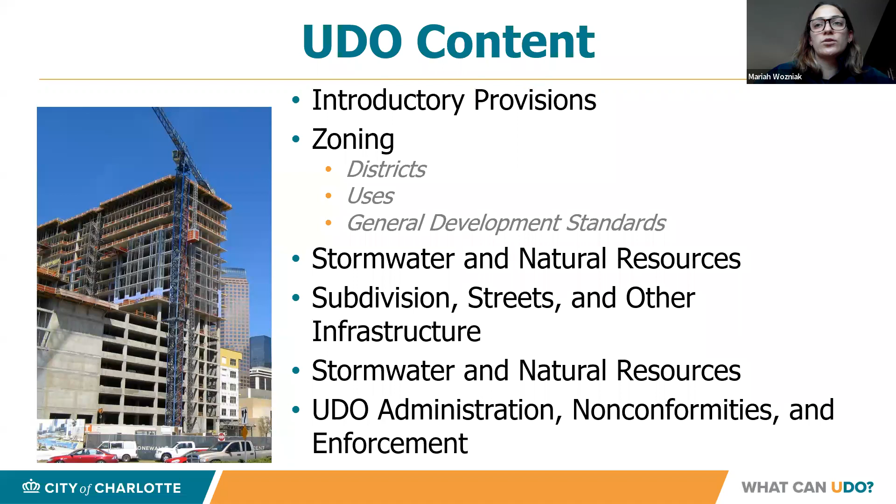Beyond those 5 broad sections, the UDO is organized into 13 parts. Each part is comprised of 1 or more of the UDO's 40 articles. So what you see on the slide is the more formal organization of the UDO, and it can show you exactly where you might find specific standards or regulations that you're looking for. So for example, general development zoning standards is part 8 of the ordinance and include articles 16 through 22.

Is Laura back with us? I'm here. Thank you. Okay, awesome. Yeah, somehow I got booted briefly. Great. Okay.

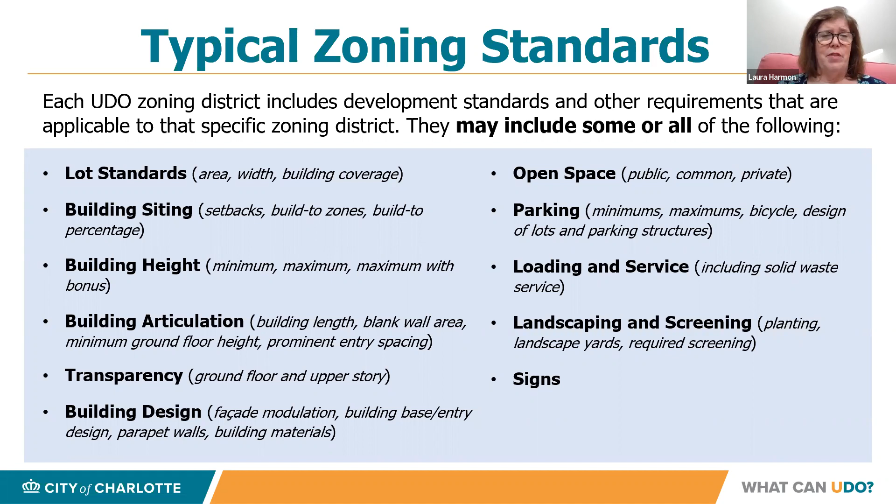A few things to know about the way the draft UDO is proposed to work, which is a little different from our current regs: many of our zoning standards are controlled by the frontage of a property. So if you're on a side of a building along a certain frontage, you'll go to the standard for that frontage type. Setbacks are an example — your building setback will depend on your frontage, typically a street frontage, though not always. It may also be an open space frontage or transit station frontage, but setbacks are controlled by the type of frontage in almost all of the districts.

There are 9 frontage types as the ordinance is currently drafted. Main Street and 4-to-5 Lane Avenue Boulevard are two examples of frontage types. For more information on frontages, you can go to pages 3-4 through 3-6.

Another thing to know is that our setbacks are measured, in all districts except the Neighborhood 1 districts, from the future back of curb. That's what we do with our current urban districts, but it's different from what we do now for a lot of the other districts. So be aware of that when looking at setbacks — it may look like that setback is really large compared to our current setback. That's because setbacks in a lot of districts now are measured from the right-of-way line, but in the future they'll be measured from back of curb. So the setback number gets larger because you're including your planting area and sidewalk in that setback dimension.

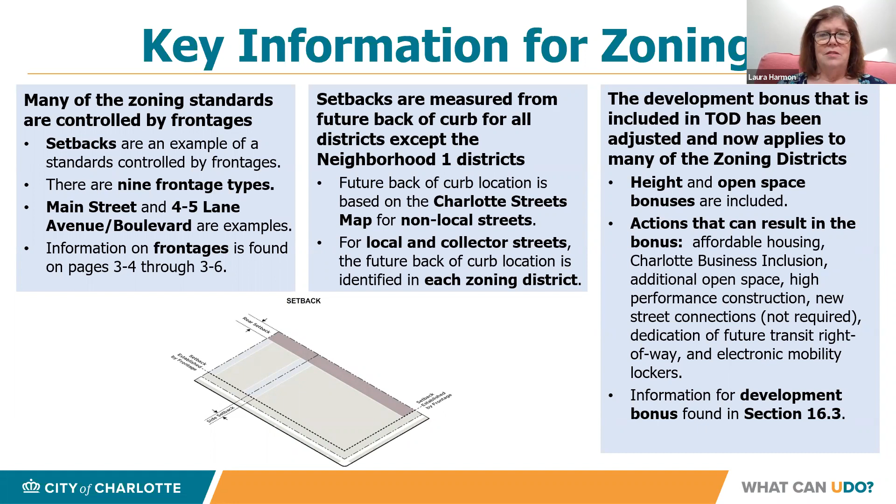Quickly moving through our neighborhood 1 districts, particularly neighborhood 1, A through E. Important to know, single family, duplex, and triplex dwellings are allowed on all lots, with quadruplex dwellings allowed on arterials with an affordable housing unit.

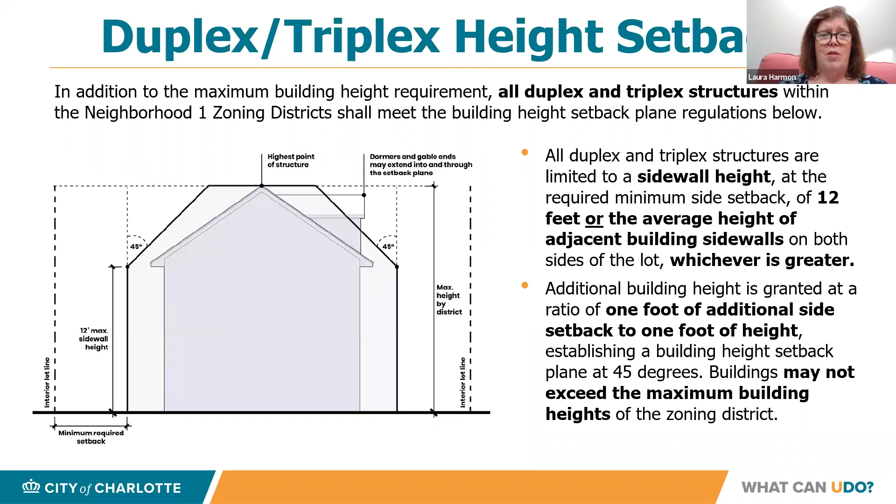You can also go higher as you move away from the edge of a property. It's a bit technical, so if you dig into this in the ordinance and have comments, we'd love to hear those.

Also be aware of a couple of development options. We have a conservation residential development that can be used with our N1 districts, which replaces the cluster provisions in our current ordinance—a different approach, but same intent.

We also have an updated version of our voluntary mixed income bonus provisions. I mentioned these earlier, so I won't go over them again, but we do have 3 overlay districts that relate specifically to most of our N1 districts.

Parking. So today is a lot of things. Going through parking, we have a new 3-tiered approach that we're proposing, and depending on your zoning district, you fit into one of these 3 tiers.

For tier 1, which are probably our more auto-oriented districts, there is a minimum off-street parking requirement and no maximum. If you move into tier 2, there's both a minimum and a maximum parking standard.

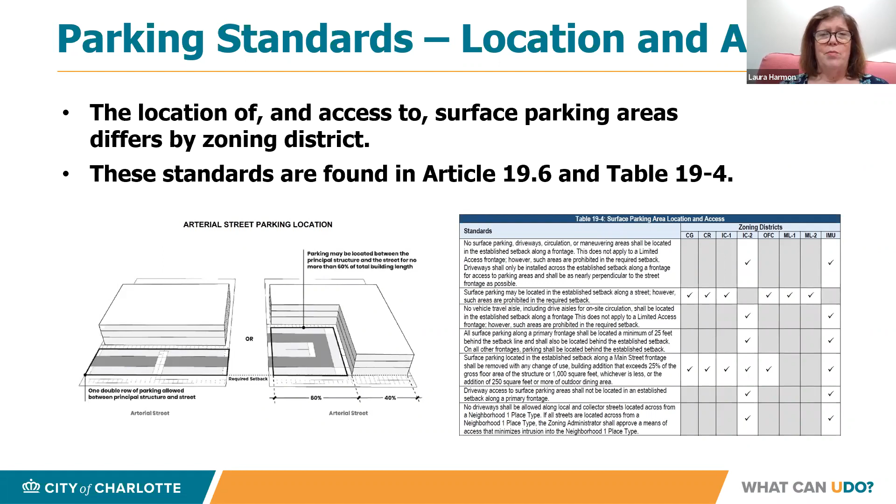And again, this is based largely on what has been done in the TOD districts.

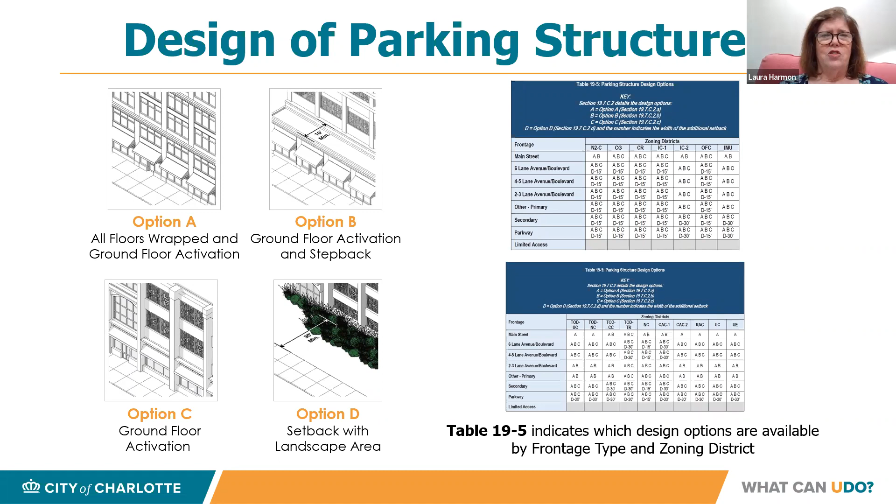Onto landscaping and screening. We have these different types of landscaping and screening. Nomenclature-wise, the biggest thing to understand is that what was formerly called a buffer is now a landscape yard.

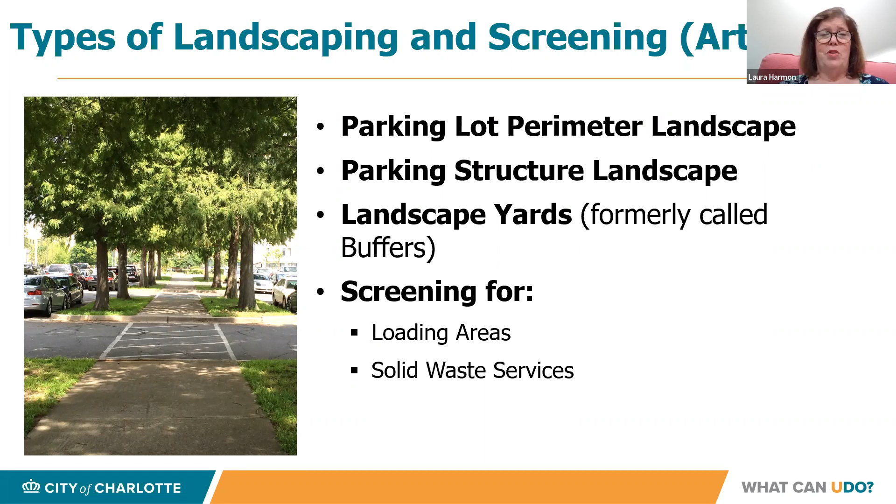Similar to buffers, we're doing these to deal with adverse impacts when you have one use that may be very intense or have impacts adjacent to a less intense use—really to provide a transition between those uses.

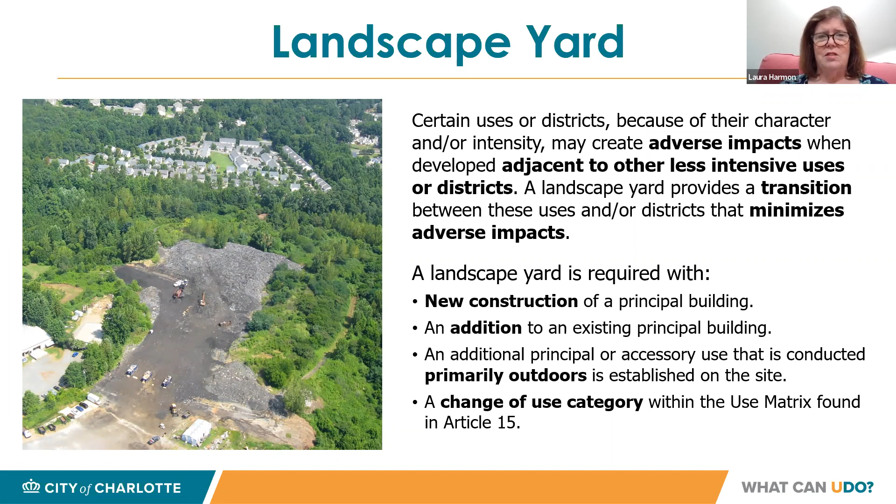Again, you'll find that we have a lot of charts in the UDO, hopefully easier to find things than reading through a lot of words.

But for the landscape yards, again formerly called buffers, you go and look for your zoning district, then look at what is your developing use and what is the use that you will be next to. That will determine what landscape yard standard you have to meet. We have 3 types of landscape yards, A, B, and C. Some similarity to what is in our current zoning regs, but also updated as far as the standards.

So take a look at those. We're really trying to make sure that we include these when we need to, protecting those uses, particularly residential, that probably require the greatest amount of protection, and letting go sometimes of those landscape yards when we don't need the transition that may be in our current ordinance. We also have some conditions, some uses that may have prescribed conditions that also require a landscape yard in addition to or different from what is in the charts.

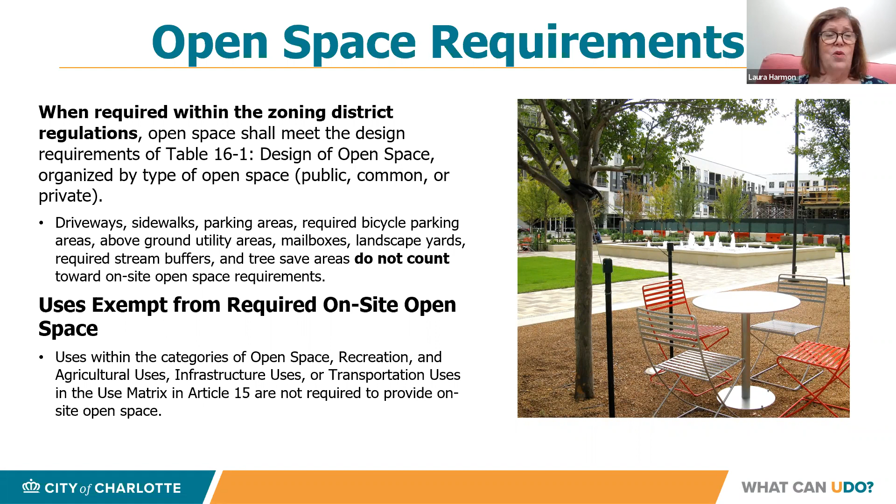So a little bit more on open spaces. As an example, you'll find a chart of what is required for, say, employment and centers zoning. You can go and find your zoning district, find the percentage of the site that is required for open space. And probably a lot of you are looking at this and going, wow, 10%.

That's 10% if it's on the ground. Yeah, it may be in some cases kind of high, but again, you have a lot of options on where that goes. So take a look at that in conjunction with the percentage requirement.

And then in a lot of cases, 50% of that open space for a lot of types of development has to be public, accessible to the public. We are going back and tweaking some of this and are hearing feedback on this, is when is it really feasible to have open space available to the public. But when you see that number, it's not 50% of your site, it's 50% of your required open space, or 25% of your required open space for mixed use development.

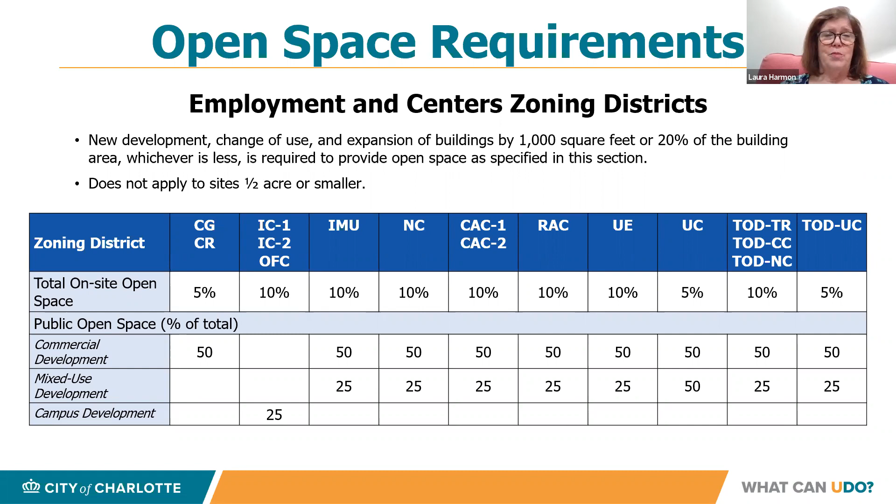And I mentioned flexibility. Again, this is something you can go back into the ordinance and look at the allowances, but we do have options for open space to be on decks, galleries, porches, terraces, patios, rooftops, balconies, in a lot of cases. So we're trying to provide flexibility to have a lot of options for where open space can go.

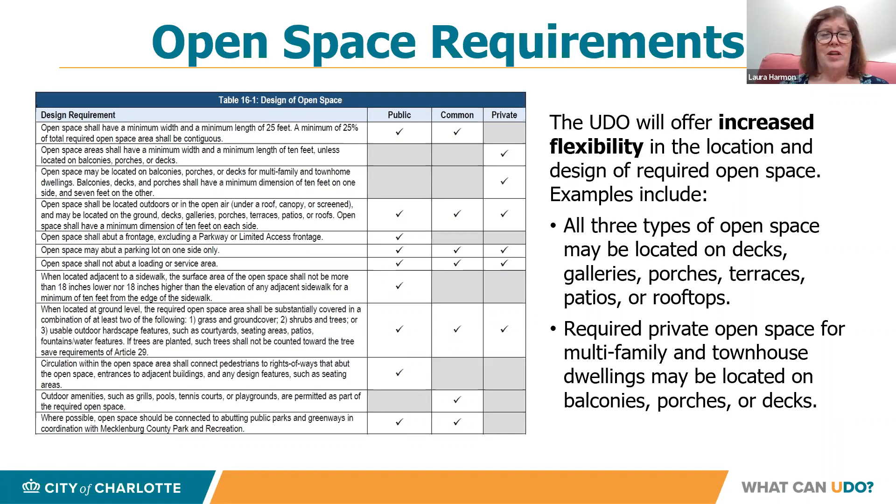So I'll say this before I get too far into my slides. Everything today is going to hit on some very key changes. We already did a virtual conversation on stormwater standards that had a lot of the intent and purpose for what we're doing. This presentation will be primarily about some very key changes and maybe how we're going to approach some of the things that we discussed in that prior meeting.

So with that being said, the first component that we wanted to present today was a discussion on Article 24, which is a new chapter on drainage standards. So subdivisions and commercial projects will continue with the current process.

So those of you that are familiar with stormwater reviews and permits, the standards are going to continue to apply, and the review process is going to stay pretty similar.

The only difference is that smaller projects are now going to be subject to some more drainage reviews, and we've gotten some questions about what that means. We want to stress that the drainage plan is going to go through a 3-tiered approach. So if you have minimal or no impact to existing drainage, you're proposing an addition to a house or some sort of yard project that could have impacts.

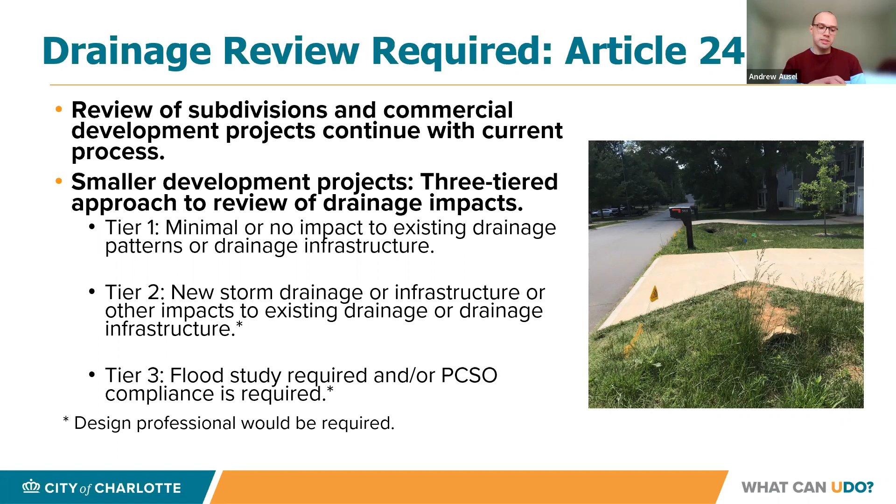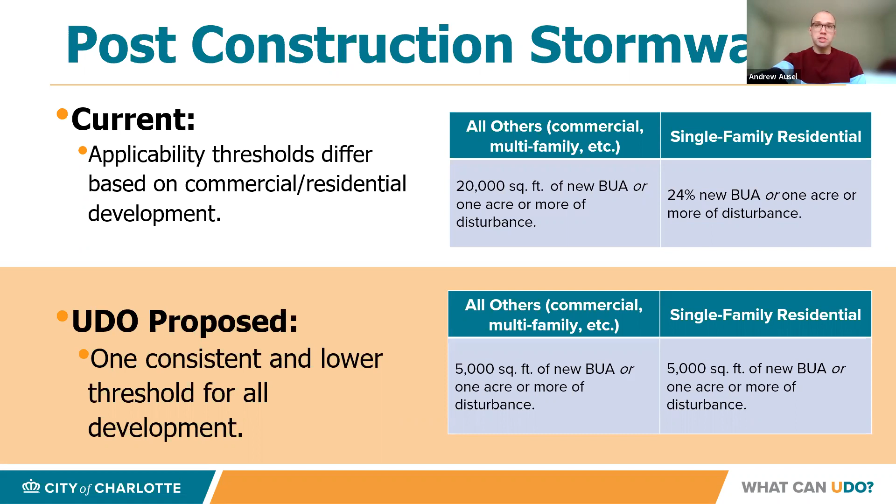This may result in us seeing more projects, but in general, I think there are a lot of benefits to this approach, and we want to get community feedback on this pretty significant change to our stormwater regulations.

The last two that we want to highlight, or I guess 3, are related to mitigation, natural area, and buffers, water quality buffers. First, on-site compliance for all sites is going to be required.

We're removing a lot of the mitigation options that are currently in the post-construction ordinance. Natural area is a requirement that is currently in our ordinance, but that is going away. We're translating that into the tree article, which does a lot of the things that we really want this area to do.

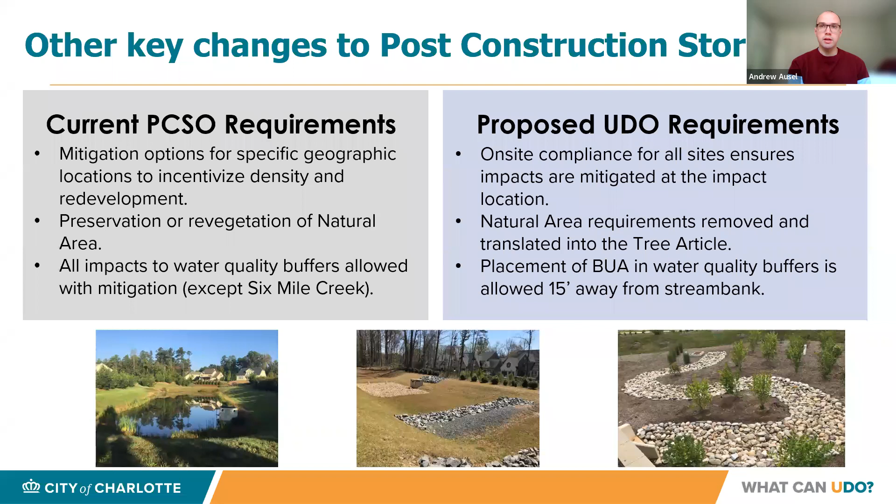If you're familiar with the current ordinance, there's a lot of mentions of centers, corridors, or wedges, how that's going to move to place types. And then finally, heritage tree protection, which has been a highly discussed topic in the UDO.

In the new UDO, we're taking all that out. We're really going to stick to construction of a principal structure, increased built upon area or building coverage, and then approval of a subdivision. You can find that in 29.2 of the UDO.

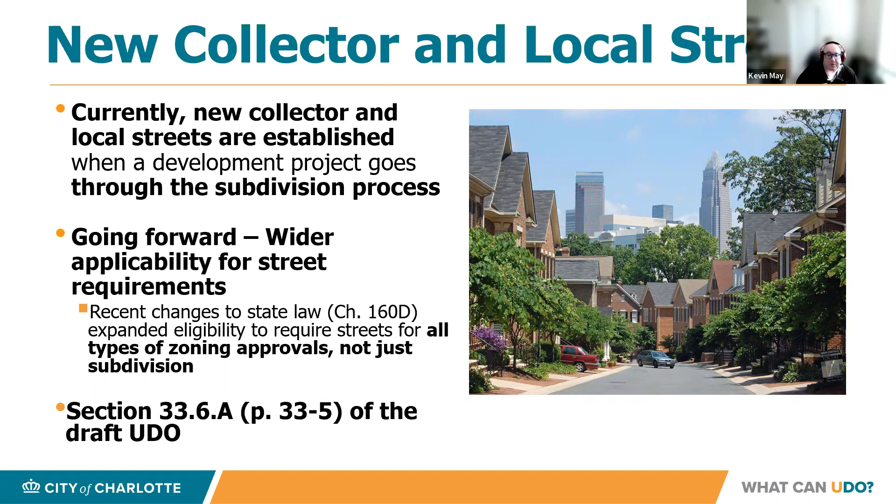So that was touching on new collectors and locals, and again those are usually built by developers through the development process. We've also got a couple other types of streets - arterials and limited access roads - and these are usually constructed by a public agency.

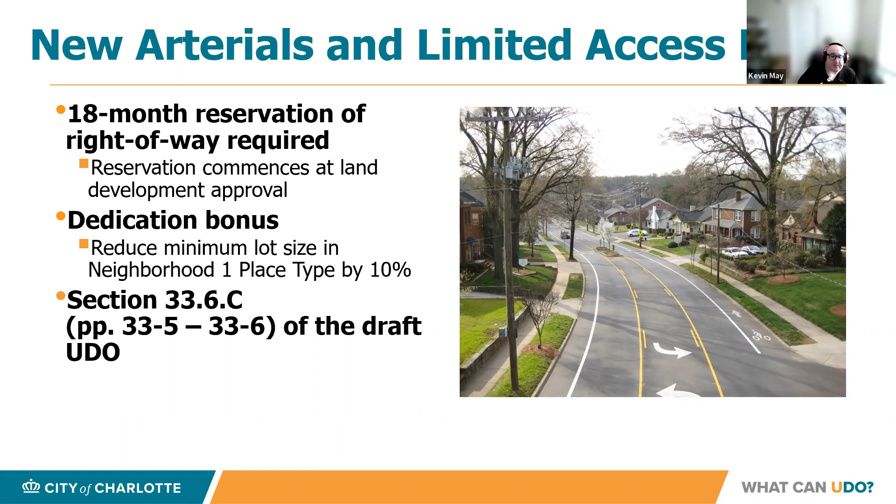So in support of a lot of the language in the subdivision streets and infrastructure part of the UDO, Laura talked about this earlier a little bit with the streets map, and the streets manual is really the umbrella document for that streets map. The UDO references the streets manual in several different places, but in a few key locations.

This is important, especially for those in neighborhoods, because this is really what's proposed to replace the city's current traffic impact study guidelines. So this is really the mechanism and process by which development will be looked at for potential mitigation of whatever development's impact may be on the surrounding transportation network.

Just an important note - the streets manual with the streets map and the CTR is all part of the strategic mobility plan. Currently that process is accepting public comment through the same timeframe as the UDO, but it will also be adopted separately as a separate process from the UDO.

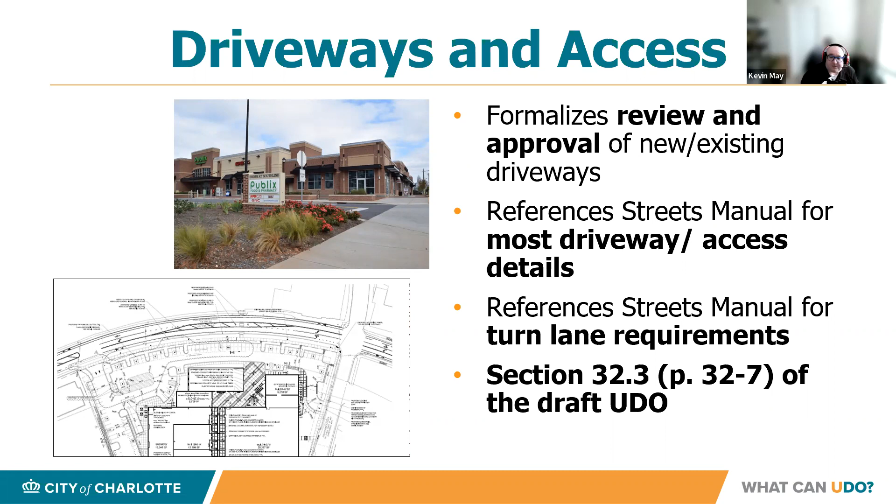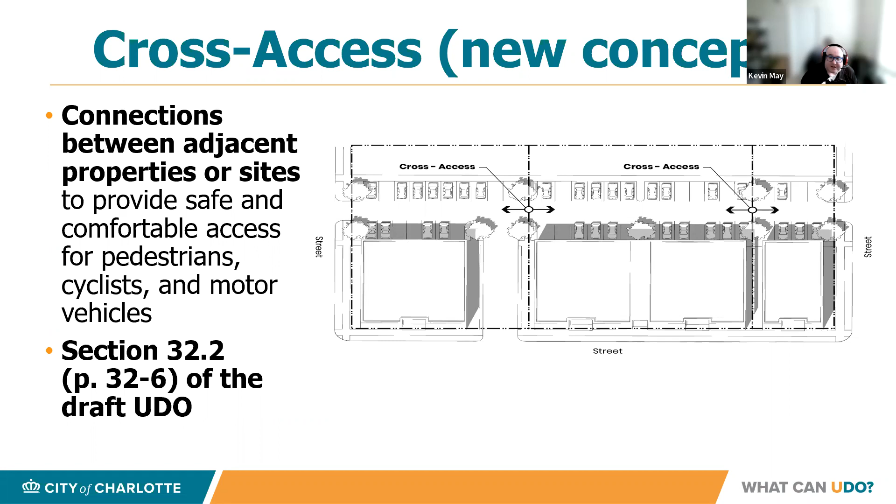Something very much talked about and rolled out as a new concept in SSI is this new concept of cross access. Some of you may be familiar with it as it exists naturally in the physical environment, but this would be a required connection between adjacent properties or sites, trying to provide more safe, comfortable access for pedestrians and cyclists, and maybe mitigate a little bit the traveling currently needed without that cross access, for motor vehicles.

Also, we recognize that off-street parks and public paths are important to our connectivity and mobility. So another piece of the draft UDO is a public access to trails piece. The purpose is to allow for connectivity from a street to that park or off-street public path, thereby allowing increased public access to those facilities and increasing mobility and access to those green and open spaces. This would be required depending on the length of the frontage of a property under development, through a public access easement. It's important to note that this access may also be combined with other required accesses for that property.

And then lastly, we've got a relocating curb and gutter section of the UDO, and that is also a new concept. Currently, this is usually achieved in the city through a TIS, a conditional rezoning, or a driveway plan approval. Going forward, this is proposed to apply to by-right development, with the caveat that the requirements would be scaled to reflect project and location. In addition, the draft UDO, in conjunction with that scaling, also has some instances of exceptions and modifications, but those exceptions or modifications would not override future curb locations as indicated by the Charlotte Streets map.

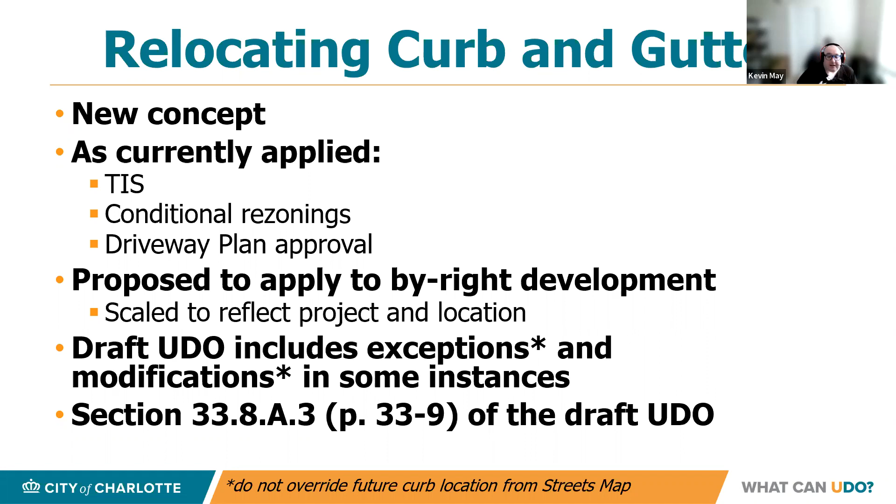And I think with that, that concludes my piece, and I'm going to hand it over to Sandra Montgomery on the UDO team for administration. Thank you, Kevin. I've been spearheading the administration articles, and I'm going to go over some of the key changes that are in those sections.

The UDO Board of Adjustment is also new. Currently, we have 3 bodies which review variances and appeals: the Zoning Board of Adjustment, Stormwater Advisory Committee, and the Charlotte Planning Commission. Moving forward, this will be assumed by a proposed UDO Board of Adjustment that will handle variances and appeals, except recommended approval and denial for major watershed variance requests, which will go to the Watershed Commission — the board would not be making the approval or denial in that case.